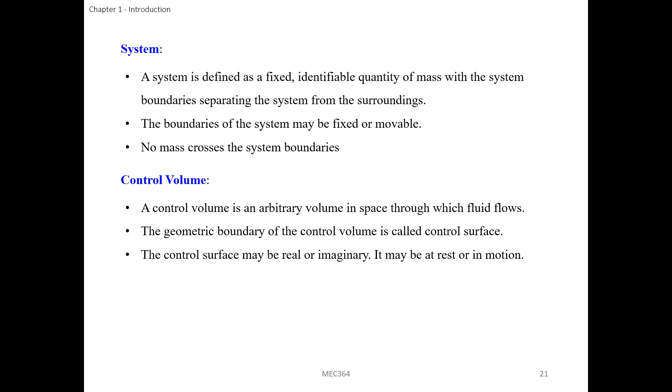So some comparison between the system and the control volume, summarizing the difference. In the system, the mass is definite, and its boundary does not need to be definite.

For example, if you specify some mass here at this t0 moment, and as time goes on, this flow element can keep moving because it will have its own velocity. So you can see that there are boundaries, there are physical locations, and their space location will keep changing with time. But the mass inside the yellow region at different times will keep constant.

So this is a system approach. Basically, in this approach we just study a piece of fluid elements which has some mass, which is constant.

Control volume, on the other hand, is defined by the location, so its boundary is usually definite. In a control volume approach, after we define this control volume, we fix our observation point at this point in this control volume, and the flow can flow into or flow out of this control volume.

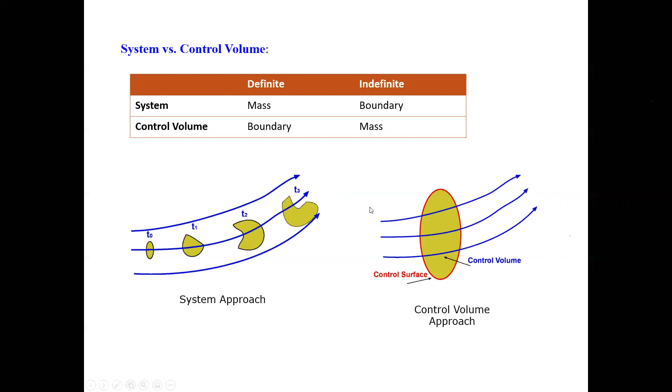Let's first think about conservation of mass. On the top is a system. You see the dashed line, the red dashed line, is the boundary of this system. And because it's closed, the total mass inside this system is constant, right?

If we want to use the concept of conservation of mass, basically in the system it's very simple: this big M means the total mass. The mass of this system will be constant. So this is the mathematical equation, the governing equation, the mass conservation equation for this closed system.

You can also write this equation in another way. Basically, the change of this total mass in the system with regard to time will be 0, which means that along with time there's no change for the total mass inside this system. So these two equations are the governing mass conservation equations for a closed system.

It's relatively simple. But if we look at the control volume, the bottom one is the control volume, and this dashed line defines what region this control volume will be.

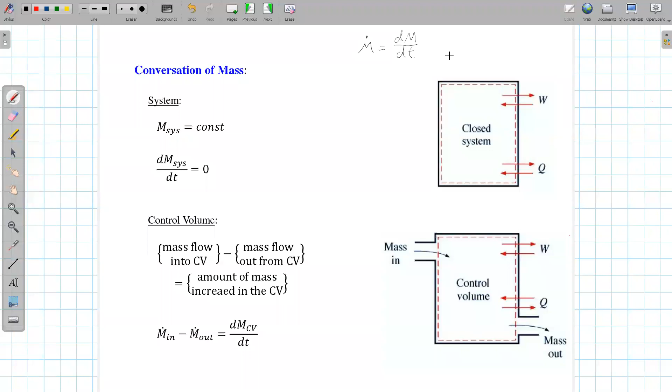Okay, so it will be here. This m dot here, this dot means the mass flow rate, defined as dm over dt. So the unit will be kilogram per second. It's different from m itself. M itself is just the mass, it's kg, the unit is kg. So don't confuse these two.

Basically, if I write this in equation form, it's telling me that m dot in minus m dot out, flow in minus flow out, will be the change of mass inside the whole control volume with regard to time. So from this comparison, you can see that if we use different ways to study, whether the system or the control volume, the result equation will be different. This is the equation for the system, and this is the mass conservation equation for the control volume.

Okay, let me give you one more example. Let's consider the conservation of energy. Not only the conservation of mass, but also conservation of energy.

We have a closed system, right? So if you're looking at a closed system, the conservation of energy is just equal to the change of the total energy inside this system, which will be equal to the total heat absorbed from the surrounding minus the total work done by the system to the environment, to the surrounding. This is, if you took the thermodynamics class before, just the first law of thermodynamics.

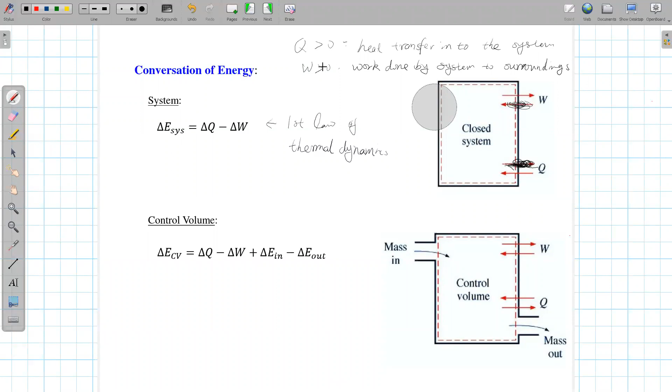I just want to use the same definition as in your thermodynamics class. W larger than 0 means work done by the system to the surroundings - done by the system to outside, to the environment. That means if this work is larger than 0, the system will lose energy, because it does work to the outside, so it has to use its own energy to convert to work. Q is different: Q larger than 0 means heat transfer into the system, meaning the outside transfers heat into the system - that's why I removed the arrow here. So if heat is adding, Q larger than 0 means you're adding energy; W larger than 0 means you're losing energy. That's why you have a plus sign for Q and a minus sign for W.

Do I answer your question? Yes, thank you very much. Okay, let me also remove this one so you won't be confused.

So Q, remove this one. Professor, just a quick question - when Q is less than 0 and W is less than 0, is it just the opposite of the statements you've already written?

Yeah. If W is smaller than 0, that means the work is done from surrounding to the system, not system to surrounding, so the system will gain energy. Same thing, if Q is smaller than 0, that means heat is transferred from system to outside, so the system will be losing energy. So if Q is smaller than 0, just reverse this direction. If W is smaller than 0, it also reverses this direction.

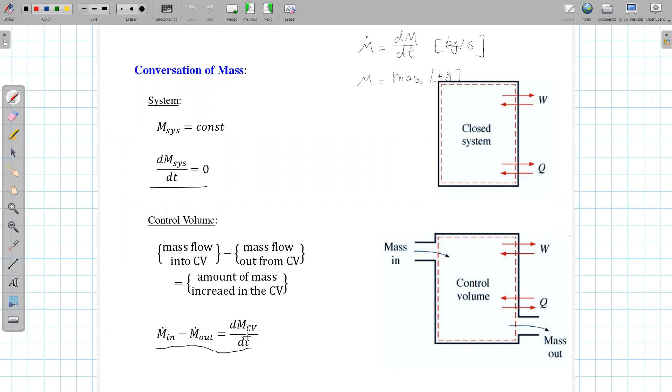This word is very important - steady. So what does steady mean? Steady basically means there's no change over time. Remember what we wrote for the mass flow rate before - we have m dot in minus m dot out equal to the change of mass in the control volume with respect to time. Let me rewrite this equation here: m dot in minus m dot out equals the change of control mass in the control volume with time.

So steady means that this term is 0 - it's not changing, meaning the flow inside this control volume is steady with time. So basically this term goes to 0.

And what is this telling us? It's telling us that from this equation, m dot in will be equal to m dot out. So however much flow goes into the system will just equal how much flow is flowing out. Now, how is the mass flow calculated?

Using small m, it's the same thing actually. The mass flow rate is calculated based on velocity - this is v, the velocity, not volume. In this textbook they use this symbol for volume and this one for velocity - you see there's a bar in the middle for volume, and without the bar it's velocity.

So mass flow rate is the density of the fluid times the velocity times the area. This is how we calculate the mass flow rate, and you can compare the units on both sides - you'll see you get the same unit, kilograms per second, if using SI units for mass flow rate.

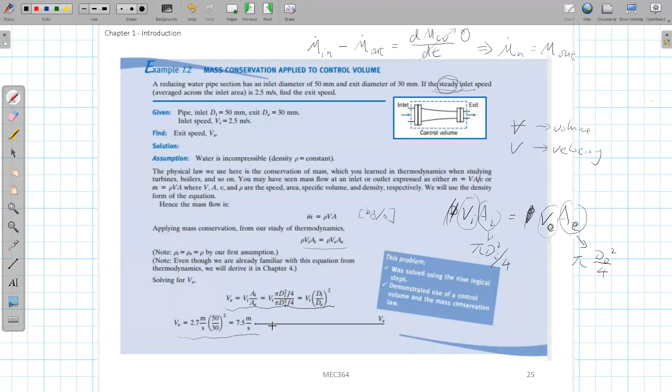So this is an example of how you can use mass conservation. This is the most important part - mass conservation lets you calculate the outlet velocity if you know the inlet velocity.

So do you have any question for this example problem? Professor - so just to clarify, the word steady just implies that the mass flow rate - can you repeat what the term steady implies? Just that the mass flow rate doesn't change?

So for control volume, steady state basically means no change with time. That means all the terms regarding partial t, if t is time, will go to zero. For the unsteady state, that means properties change with time, so all these terms will not equal zero.

Professor - why is it 2.7 meters per second at the bottom next to velocity out or exit when the given was 2.5? It's coming from this equation here, and this VI is the inlet velocity - this 2.5 here.

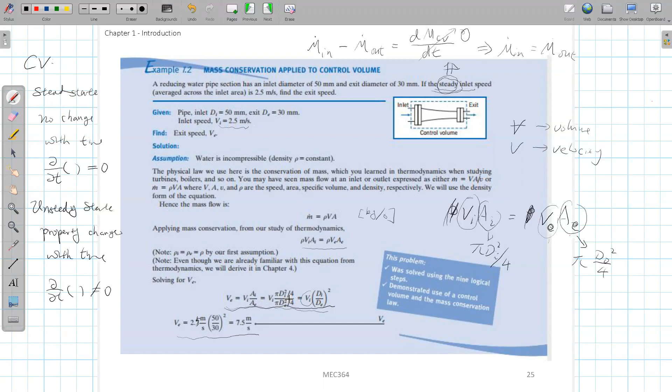So now we're introducing two methods. We can study the fluid in a system, or we can study a flow going through a control volume. These two ways lead to two different description methods for the fluid. What does this description method mean? If we want to describe how this flow is moving, how the flow field will look like, we need to know the velocity, the density, the pressure - all these properties for the flow. There are two ways to describe that.

The first way is called the Lagrangian way, which is tied to the system. This means we try to describe the flow based on the mass, not based on the volume, not based on their physical location. For example, if we have this fluid particle here, and I want to observe this particle - I want to tag this particle and observe it. And if this particle is here at t0...

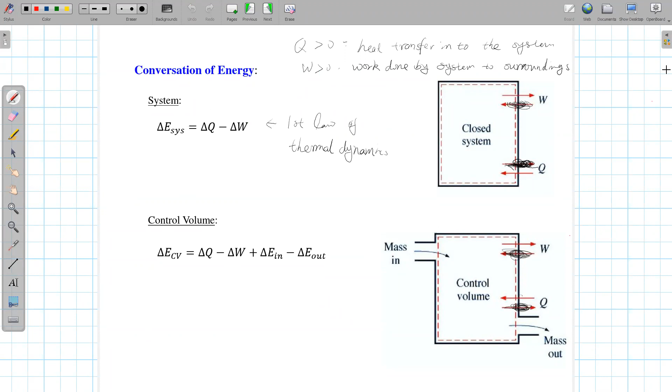So this is the summary to see the difference. We can apply the conservation laws to both Euler and Lagrangian approach, and we get different equations. Why? Because the Euler method is based on the control volume, so you mostly get the equation based on control volume, and the Lagrangian is based on the system, so you mostly get the equation for the system.

Also, using the Euler method, the equation you get, the properties you get, is as a function of location and time. If you're using the Lagrangian approach, the equation you get is basically just for a single point, for a single mass particle, and it's only a function of time.

Professor, so would you say, let's say we do the Lagrange approach for many different particles, and if we take the average of those, would you say we get the Euler value, kind of?

You cannot just do that. Your statement is partially correct, because you are saying that if you use the Lagrange method, you have to measure all the particles. That is correct, if you want to get the information of the whole flow field.

But the second part is not correct, because you cannot just simply do the average. At a given time, this particle here is particle A, and maybe I can define this as particle B, and at the same time, A is at this position, B is at this position. You just cannot average these two positions, it doesn't give you anything. You cannot just do simple averaging. It's not a sampling measurement where you measure this same position many times and then average it. No, because they represent different particles at different material, different locations.

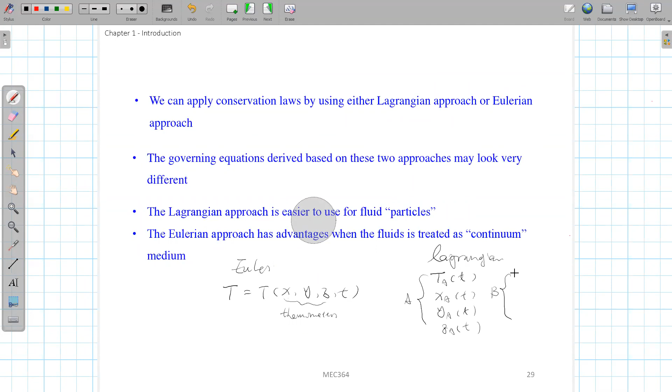For the Lagrangian method, what do we need? It's like we have T of A of T, X of A of T, Y of A of T, and Z of A of T. So this is for only one particle, particle A. And then I also need to measure particle B for the same thing, and particle C for the same thing. I add all these, many numbers of particles, together. Then you can get the whole temperature field at different T.

You know what I'm talking about? So this is the difference. Basically your thermometer, this is one thermometer for a particle, and this is another thermometer for the second particle, so this is a thermometer for another particle. So your thermometer is going with each particle. And for the Euler method, you also need many thermometers, but you just place the thermometers in different places. In this case, the thermometer is moving with the particle; in the other case, you just put it in that location.

So there is a way you can convert between each other, but that is very mathematical, so I won't go through that part in this class. Both methods will give you the complete description of how the temperature field will be over the whole flow domain. So if you get there, there is a way you can convert between them, but by math, basically it's like you have to use some coordinate transformation way to do this, based on the velocity, this kind of thing.

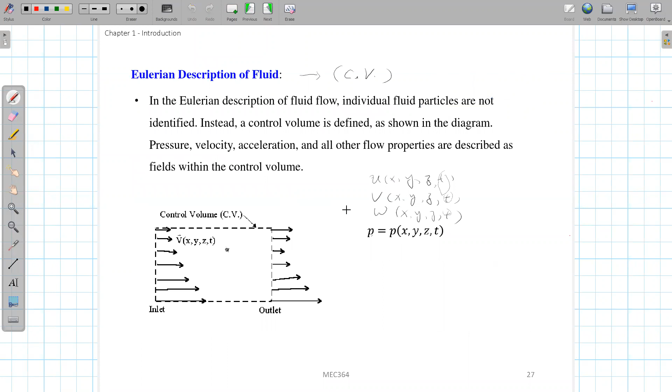Yeah, that's why I'm telling you that in fluid mechanics, basically we don't use the Lagrange method, because it's impossible to track all the particles. But in some other cases, like the example I gave you before in your dynamics class: if you have a solid part, a solid, and I want to calculate the kinematics, where is the location, where is the velocity, then you can, because you can simplify the whole solid as one single point, you can use the Lagrangian method for this. Then for your dynamics class, without any issue, no problem.

Think about it, F equals M times A, this is Newton's second law. This is basically for a single point. So it's telling that the force on this one will be equal to the acceleration on this one. So this Newton's second law is indeed a Lagrangian law, it's not a control volume law. It's focusing on this one single point, a single particle, going with the mass. So this is going with the mass, Newton's second law.

So that's why I'm saying that in fluid mechanics, we do not use the Lagrangian way, we just use the Euler way. We do the control volume method because we just cannot track all the particles. There's no way to do that.

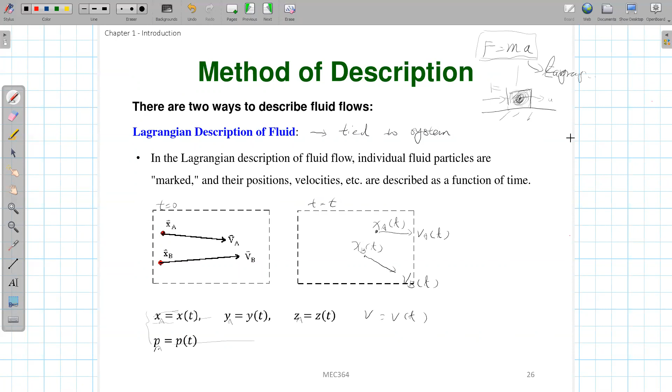Right, makes sense, thank you.

Okay, professor, yes. So to my understanding, Euler's method is basically, in this example of the chimney, measuring the temperature in a given area, a given location, and for Lagrange, it's just the temperature at a particular particle. Yeah, you're absolutely correct, okay, no problem, that is great.

So this is some summation, and the last important thing is that in the Lagrangian method, we try to track each fluid particle. But as I told you, there are so many particles in the fluid, we just cannot go to the molecular level and track each molecule. So you can think that the Lagrangian approach tries to track particles, while in the Euler method we don't think about particles anymore. We just think that the whole fluid is a continuum medium, with no distance between molecules. We neglect all the particle behavior of the fluid and think that everything is continuous.

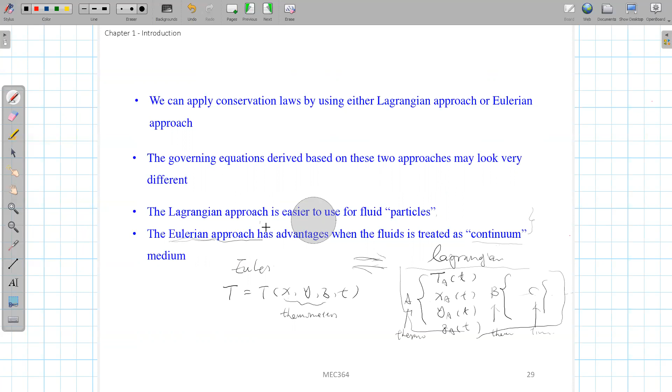Okay, the next topic is regarding the system of dimensions. So what does dimension mean? You can think of it as a very fundamental physical characteristic, like length is a very fundamental property, time is one dimension of physics, and we also usually think of mass and temperature in fluid mechanics as fundamental dimensions. So we call length, time, mass, and temperature the fundamental dimensions.

This is because any other property, like pressure, density, force, or energy, can be represented by these 4 fundamental units. For example, let's think about force. We know from Newton's second law that force equals m times a, where m is mass, which is already a fundamental unit.

And a, acceleration, is equal to dv/dt. The change of velocity is the change of length divided by dt. So for acceleration, we can write this as L divided by t squared. This means that force itself is not a fundamental dimension, because it can be represented by other dimensional quantities: mass dimension times length dimension divided by the square of time dimension.

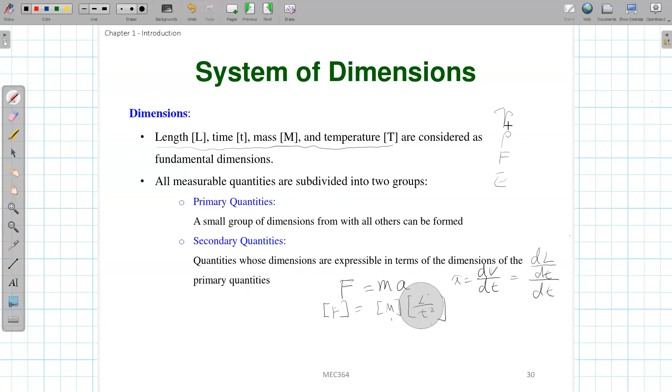So in this way, all measurable quantities can be subdivided into two groups. The first group is called primary quantities, which are these 4: L for length, small t for time, m for mass, and big T for temperature. The second group is secondary quantities, meaning all other properties that can be expressed in terms of these primary quantities. Force, pressure, density, energy, velocity, acceleration, vorticity, and everything else can be thought of as secondary quantities.

Okay, so how to choose which quantity will be the primary quantity? In the example I gave you before, we choose mass, length, time and temperature as the primary quantities.

We also showed this using Newton's second law, where force is related to mass, length, and time. So if I don't use mass and instead choose force as the primary quantity, then mass cannot also be a primary quantity. Because force and mass are correlated, you can only choose one of them as a primary quantity, since once you choose mass, you can get force from it, and if you know force, you can get mass from it.

So the second way is that we replace mass with force as the primary quantity. And there's a special one - this is the last system, and it's only used in North America. In this system, both force and mass are used as primary quantities.

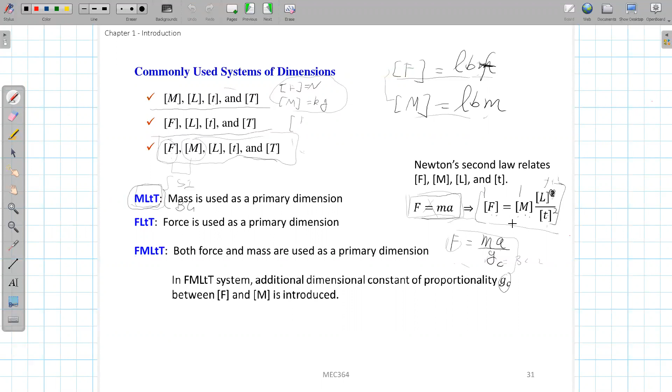So this is the dimensions. Don't confuse this dimension system with the unit system. Unit system belongs to dimension, but it is not exactly the same as the dimension. For example, you can use SI unit for MLTT, and we can also have another unit system called the CGS unit system, which means for the mass I'm using gram, for the length I'm using centimeter, and for time seconds. These are another unit system for the MLTT, so for different dimensions we can have many unit systems.

And for the SI unit, it's for the MLTT. For this British gravitational unit, you can also call it BG unit, it's for FLTT because it's using pound force. And this EE unit will have FMLTT, you'll have both force, mass, length, time, and temperature. Is that degree Rankine? Is that this? It is the Rankine degree for temperature. Yeah, Rankine for temperature, and this is the Kelvin for temperature.

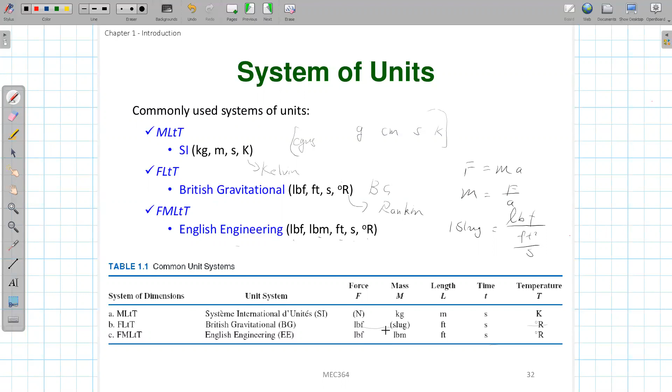Let me give you an example for each unit system. For the SI unit, mass is kilogram, length is meter, time is second, and temperature is Kelvin. If you're using Newton's second law, you can derive F equal to ma. F, 1 Newton, will be equal to 1 kilogram times meter per second squared. So you can get the conversion between the Newton and kilogram meter per second squared.

And in the BG unit, same thing, because force is known, we can calculate the mass from it. So one slug will be 1 pound force divided by A here, which will be feet per second squared.

Some of you guys are chatting?

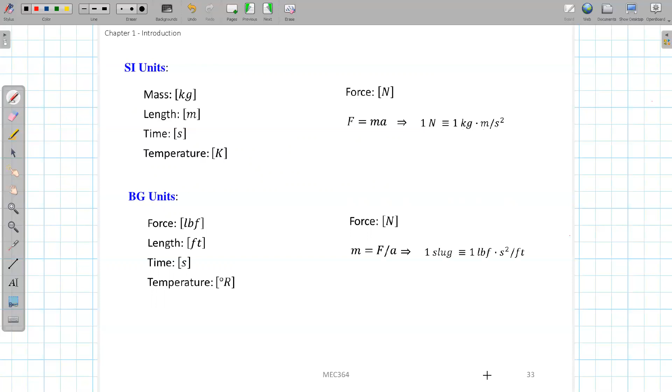All right, so then for the EE unit, because we're using both force and mass, there will be an additional conversion factor called GC introduced. So in this case, your Newton's second law will be F equal to ma divided by GC here, and 1 pound force will be equal to 1 pound mass times this A, which is the gravity acceleration, divided by this GC. This is because in this system, 1 pound force is defined as the weight of 1 pound mass under gravity, so this is the definition between this.

So that's why this A has to be the Earth's gravity acceleration, divided by GC. So by this way, you know that this GC constant is this one, with this additional unit here. So it's not dimensionless - it's not a dimensionless parameter.

It has units for this GC. And particularly, in the EE unit system, all the equations will look different when you involve force and mass - you have to add this multiplication because of GC. We have three major systems: SI, BG, and EE. In this book, we only focus on the first two, the SI unit and the British unit.

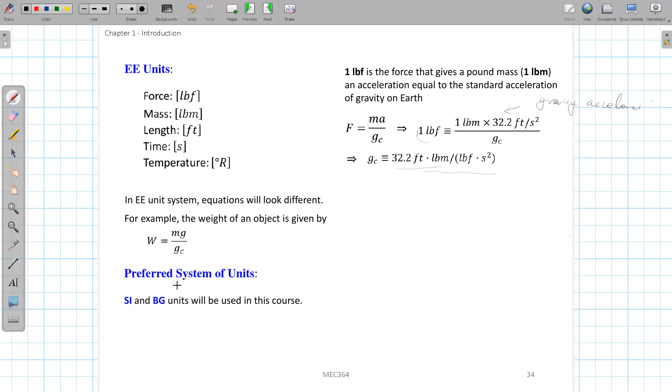So there is an example problem on how to convert units between the different unit systems - how to convert length from SI to BG or to EE, and those other things. I will leave this example problem to next week's recitation, so we don't do that now.

One last thing regarding units: if you have an equation, you need to make sure that the dimensions in this equation are consistent. What does this mean? This simply means that if you calculate the dimensions of each term in the equation, they should all have the same dimension if expressed in those fundamental quantities. Let me give you an example.

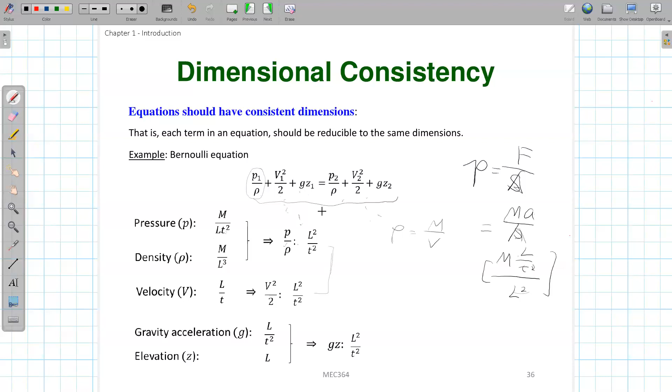All right, so the last topic for this chapter is for the experiments, okay. It's introducing the experimental error.

So you know that in fluid mechanics, when we try to use experimental equipment to measure the quantities, we get experimental values we measure, but because of some errors during the experiments, these conditions, you cannot be 100% accurate. You always bring some error during the process of this measurement, and this error is called the uncertainty.

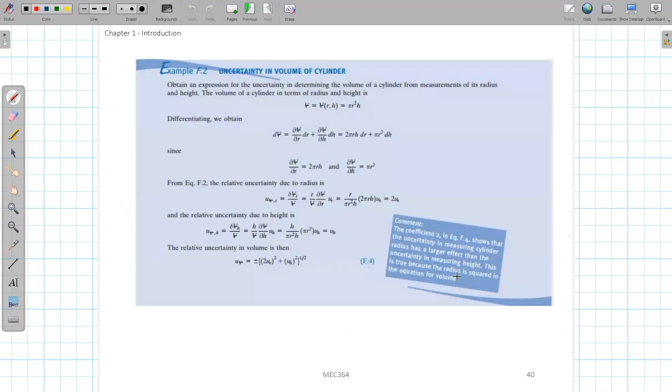So this is some additional topic, it's in the appendix of your textbook. If you're interested in this, you can try to read it in appendix E, or F depending on your edition of the textbook. I also give an example problem of how to really use these correlations, so if you're interested you can go through this example problem yourself.

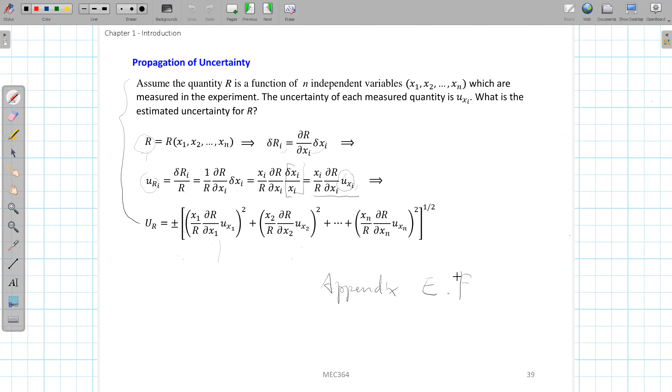So do you guys have any questions? No? Okay. So just want to let you know that this experimental error part is not required for the exam, just some additional topics for you guys.

Here we finish the content in chapter 1. It's just some fundamental introduction for fluid mechanics and the methods we use to study fluid mechanics. Next lecture we are going to go to chapter 2, where we'll introduce some fundamental concepts we use in fluid mechanics, like velocity, viscosity, streamline, streakline, and so on.